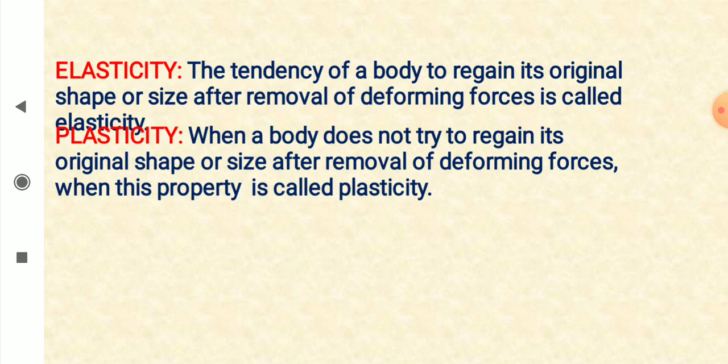And no substance is 100% elastic or plastic. क्वार्ट्ज और आइवरी बॉल्स ये ऐसे हैं जैसे कि हार्ड बॉल्स हैं, दे कैन बी ट्रीटेड एज कम्प्लीटली इलास्टिक, नियरली 100% इलास्टिक. एंड वैक्स क्ले कैन बी ट्रीटेड एज नियरली कम्प्लीटली प्लास्टिक.

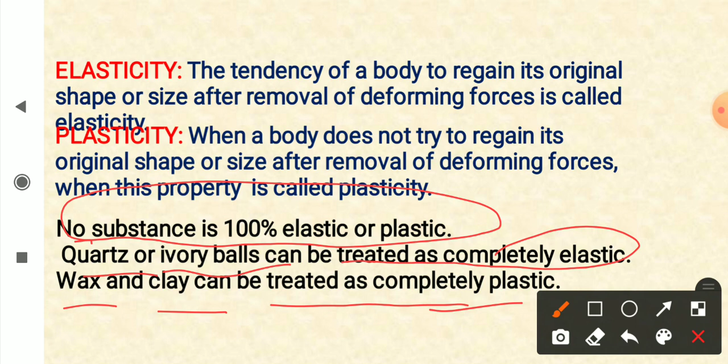So let us talk about stress. Now, when a deforming force is applied on a body, a restoring force within the body opposes it. This restoring force per unit area is called stress.

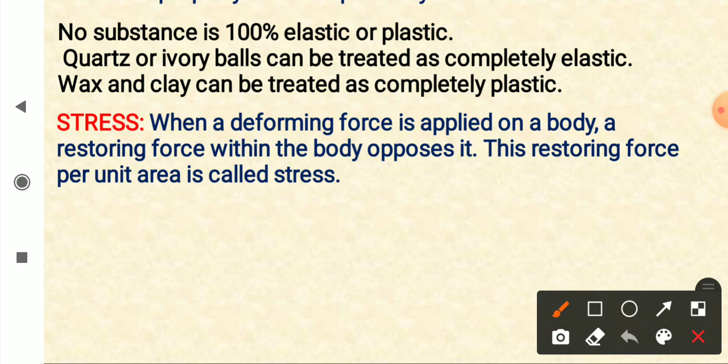कोई भी अगर बॉडी है whatever shape और size, इसको अगर आप एक्सटर्नल फोर्स लगा के डिफॉर्म करने की कोशिश करेंगे तो इसको अपोज करने के लिए इंटरनल फोर्सेस लगते हैं. These internal forces per unit area is called stress.

Similarly, supposing you have a long wire और इसको आप नीचे से पुल करके इसकी लेंथ बढ़ाना चाहेंगे तो इसके अंदर एक रेस्टोरिंग फोर्स होगा जो इसकी लेंथ को वापस लाना चाहता है. So that restoring force per unit surface area will be called stress.

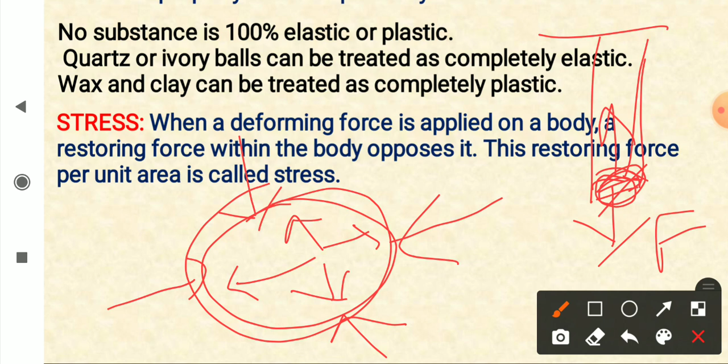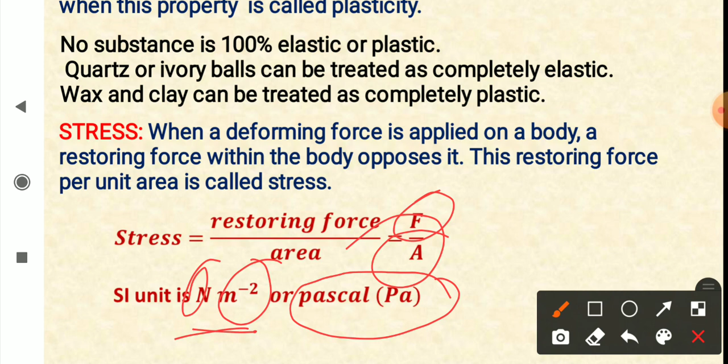So, stress is restoring force per unit area, and its SI unit: force is Newton, area per meter square, so Newton per meter square. And this is also pressure, its SI unit another name is Pascal, symbol PA. So Newton per meter square or Pascal, and this is a scalar quantity.

Now, types of stress. Stress can be of various types. First one, let us talk about normal stress.

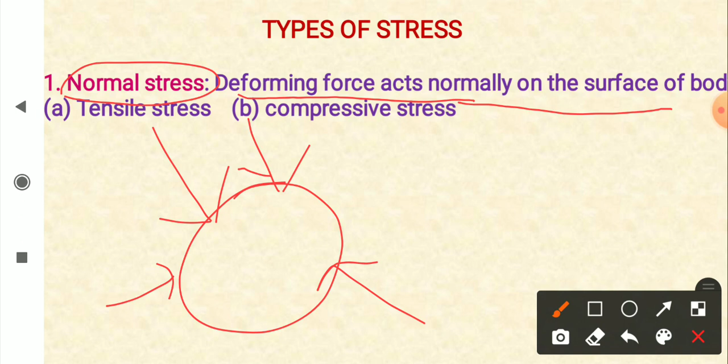Now, for normal stress, the deforming force acts normally on the surface of the body. कोई भी body के अगर normal आपने force लगाया है, so that is called normal stress. You can have a flat surface, and on this flat surface you can apply force like this. So surface के अगर normal या perpendicular force है तो वो normal stress देगा.

And then we have two types of normal stress: tensile stress and compressive stress. So let us talk about tensile stress. Now, tensile stress is produced in long wires.

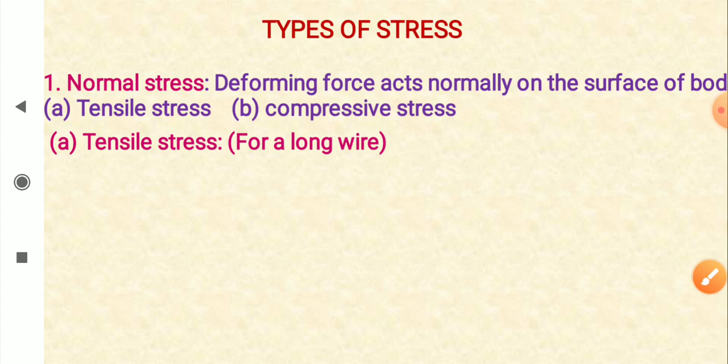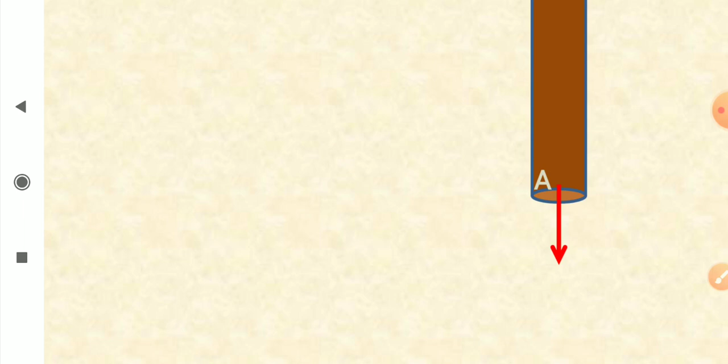Supposing we have a long wire and its area of cross section is A, you can see, and some external force is applied on it. आप इस वायर के इस एरिया पर फोर्स F लगाकर इसको पुल करने की या एक्सटेंड करने की कोशिश कर रहे हैं, and because of this, an internal force will come into play.

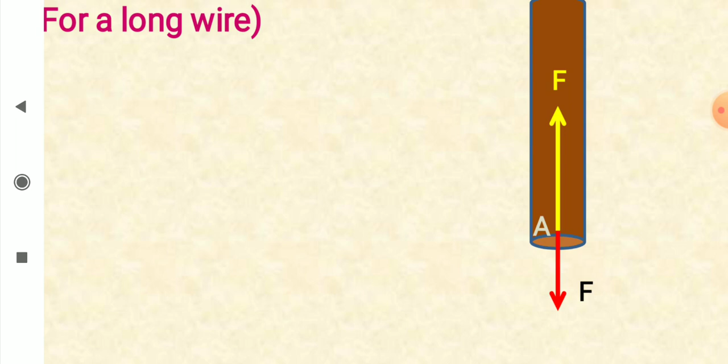And in equilibrium, when this wire is in equilibrium, then this internal restoring force and external applied force will be equal. So internal or external forces equal होंगे. So the tensile stress is restoring force upon area, and this restoring force is normal to the surface, so it is normal stress. So restoring force is also equal to applied force, so applied force upon area.

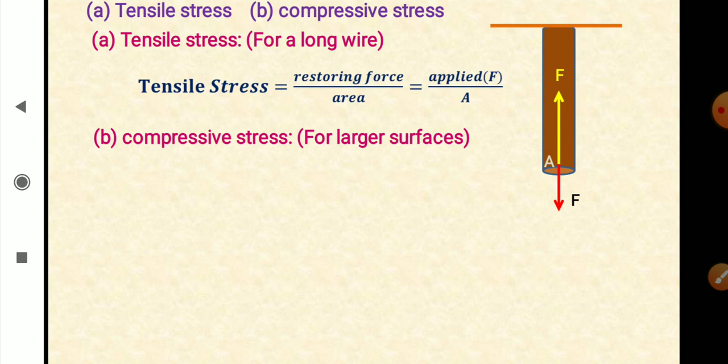So this is tensile stress applicable to long wires or rods only. Now compressive stress. Now supposing we have a body with large area.

Like supposing we have a ball dipped inside a liquid, as you can see here. The ball is dipped inside a liquid और liquid पर है, तो इस पर सब डायरेक्शन से फोर्स लग रहा है. As you can see, force is applied from all the directions on this ball, and these forces are normal to the surface of this ball. So this is normal stress.

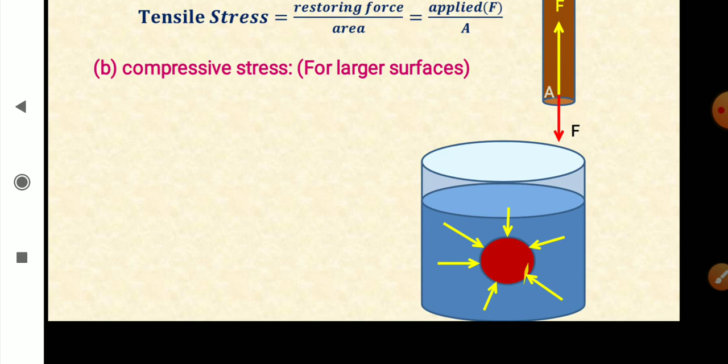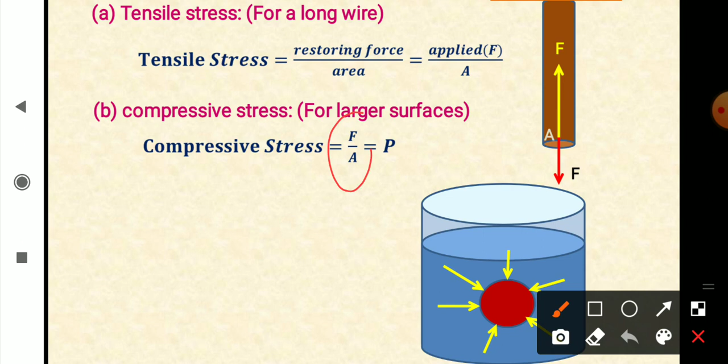When a body is compressed, there is compressive stress, and because of this there will be a restoring force inside it. That restoring force will be equal to the external applied force in equilibrium position. So the compressive stress will be applied force upon area, which equals the pressure. See, pressure is force per unit area, you know that.

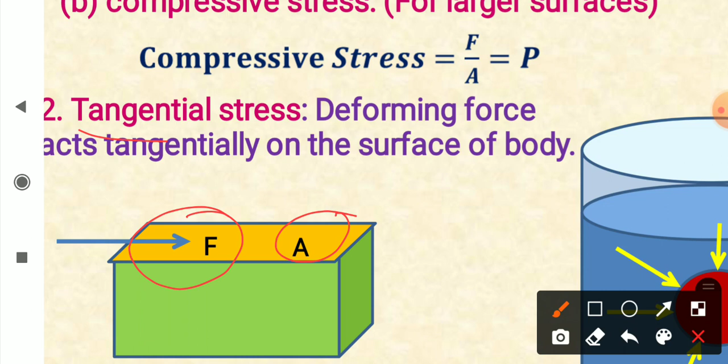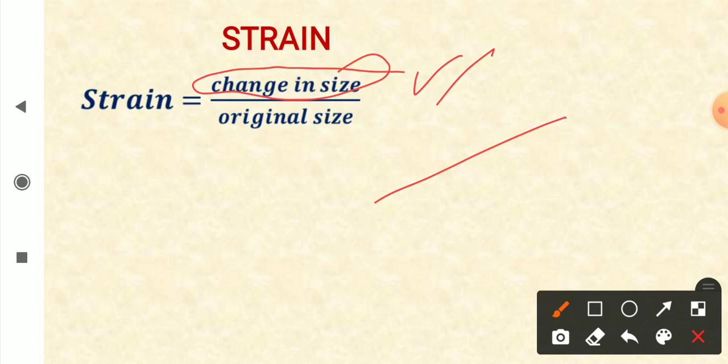Now let's see strain. When a stress acts on a body, the body undergoes strain. There will be a change in size - length may increase or decrease, or volume may increase or decrease, so there will be change in size and change in shape. So strain is change in size upon original size.

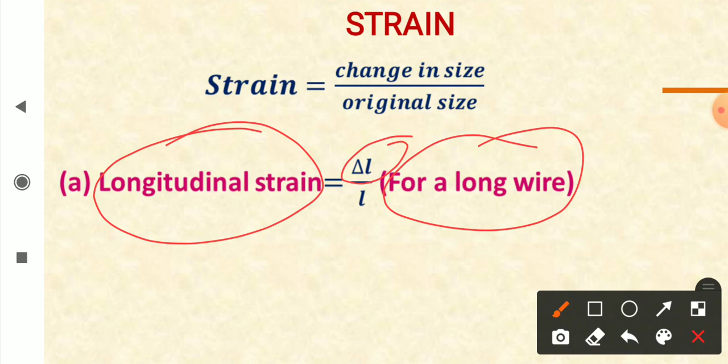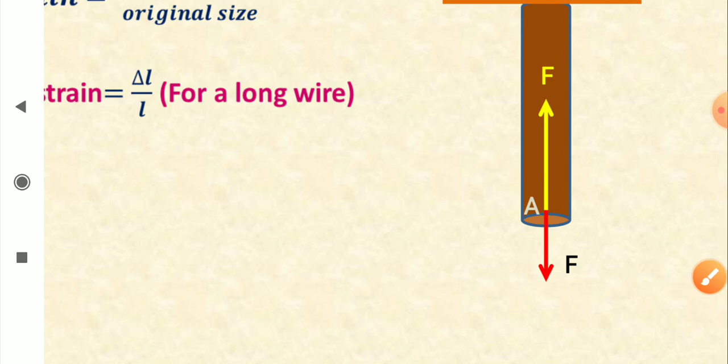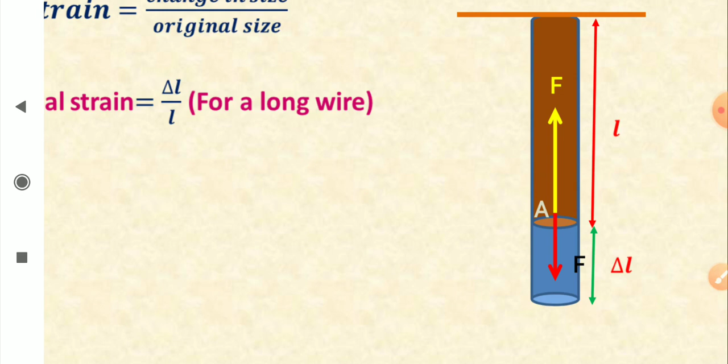For a long wire, the change in length will be quite large. If you look at a long wire, when you apply external force, its length increases, but there will not be much change in the width. So we consider only the length. If the original length is L and on applying force its length increases by delta L, then this increase in length upon the original length becomes its longitudinal strain. So change in length upon original length is called longitudinal strain, applicable for long wires.

Now let us talk about volumetric strain. In volumetric strain, the change in volume is large. So change in volume upon original volume - this is for larger bodies having larger surfaces.

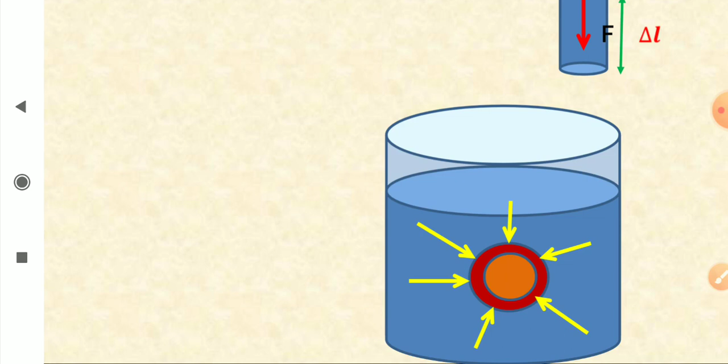Let's see, like here. When you apply this, due to external pressure, the volume decreases, the body gets smaller, it gets compressed. So here the strain is called volumetric strain.

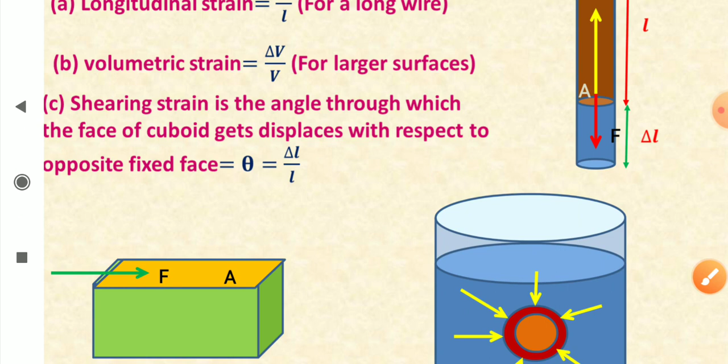So in that case, the angle through which the upper surface shifts with respect to the bottom is called shearing strain. We call it shearing strain. If the length of the sides is L, and the shifting is through distance delta L, the separation between these two surfaces is L, and the shifted surface has separation delta L, then this angle theta will be equal to delta L upon L.

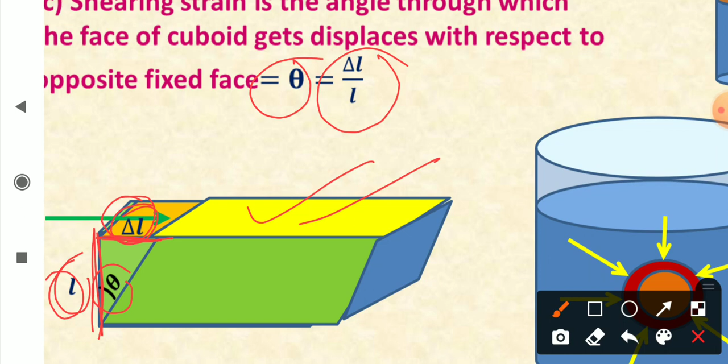This is called shearing strain, and this happens when tangential stress is applied. So shearing strain is the angle through which the face of the cuboid gets displaced with respect to the opposite fixed face, and this equals delta L upon L.

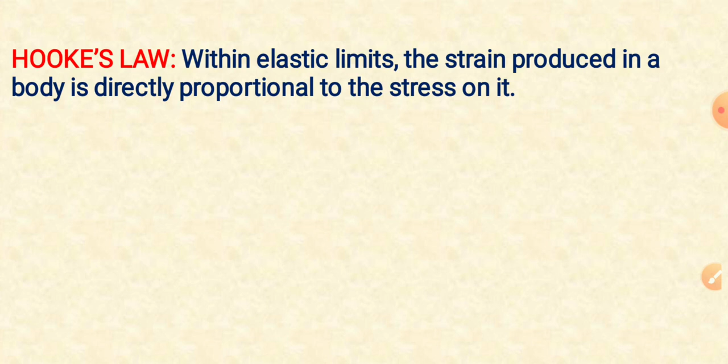So now, Hooke's law. We have done Hooke's law for springs - it is applicable here also. Hooke's law: within elastic limits, the strain produced in a body is directly proportional to the stress on it.

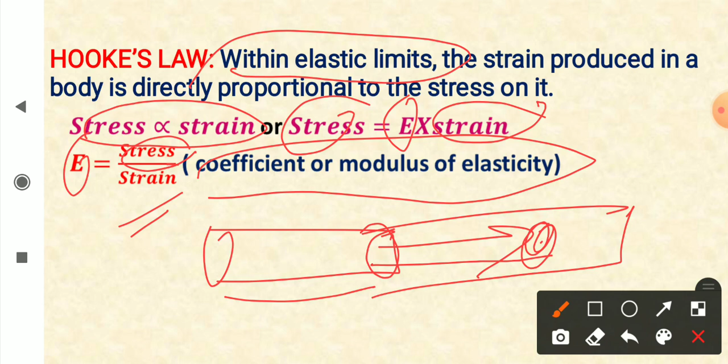Depending on the type of stress and strain, we have three different types of coefficients of elasticity, or modulus of elasticity. Let us begin with Young's modulus. For a long wire or a rod, we have Young's modulus, which is tensile stress or normal stress upon longitudinal strain.

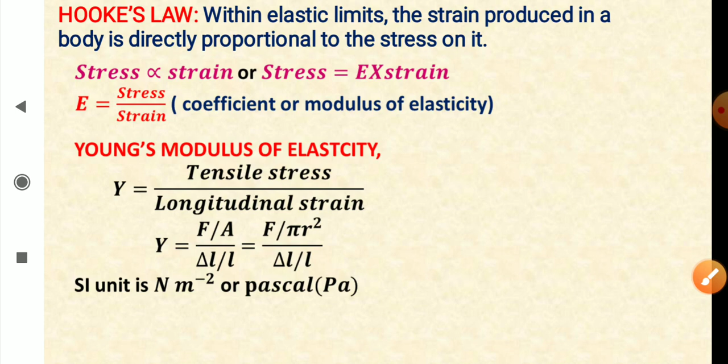External force applied is F here, or restoring force is also F. So stress is force upon area, that is also called tensile stress, and longitudinal strain is change in length upon original length, and area can be pi r square. So stress becomes F upon pi r square, where pi r square is the area of cross section of this wire, and r is the radius of this wire.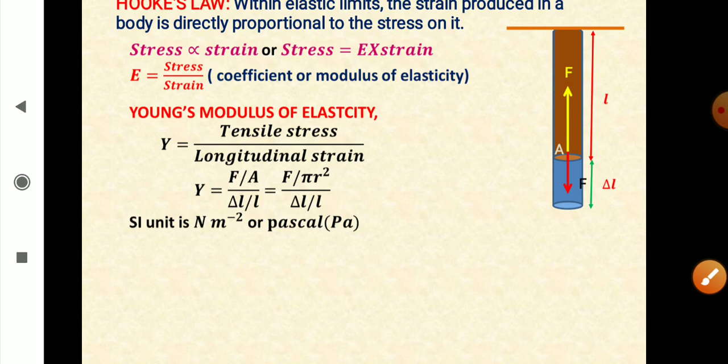The strain does not have any unit, so the unit of Young's modulus will be same as Newton per meter square or Pascal, which is the unit of pressure. So that is Young's modulus.

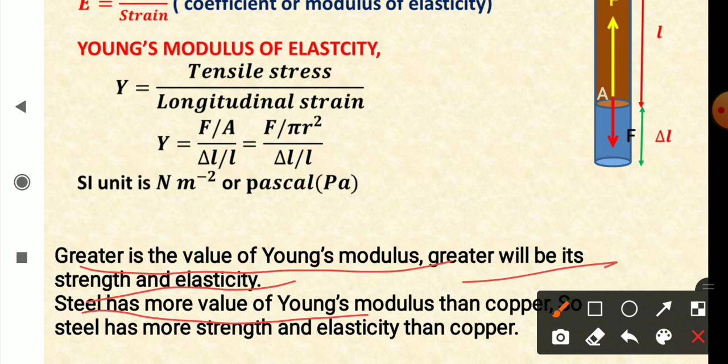Greater is the value of Young's modulus, greater will be the strength and elasticity. So for steel, the value of Young's modulus is much larger than its value for copper or gold. So steel has more strength and more elasticity than copper.

Now if you have a rubber band, it stretches to a very long length, and steel does not stretch much. You cannot see the increase in length of a steel wire without measurement. So you may tend to say that rubber is more elastic, but no, it is steel which is more elastic.

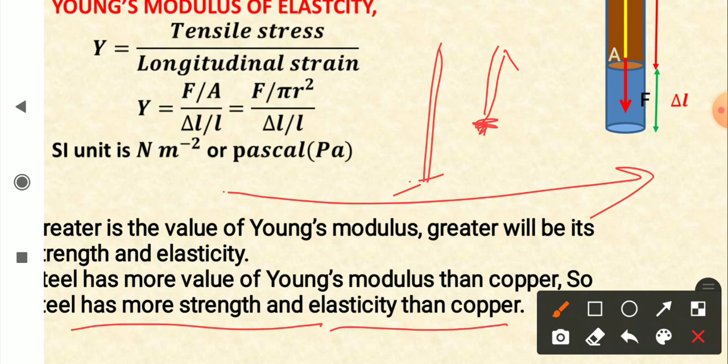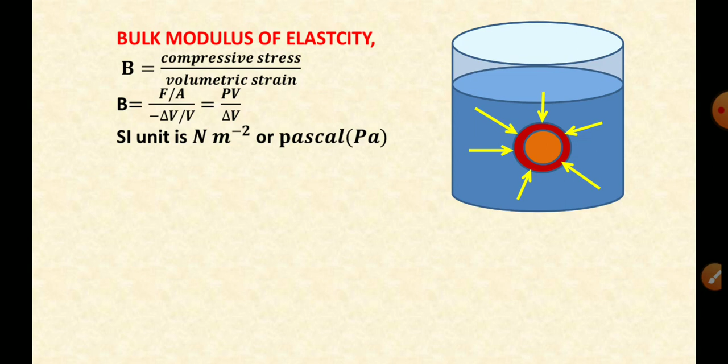Now let us look at a different type of elasticity, that is called bulk modulus of elasticity. When the change in volume is large, then we use this one. Here bulk modulus is compressive stress upon volumetric strain.

When this ball is immersed in this liquid, it is being compressed from all sides, so it is compressive stress, normal stress, and the volume changes, so it is volumetric strain. So bulk modulus is F upon A upon minus delta V upon V. Why minus? Because volume decreases.

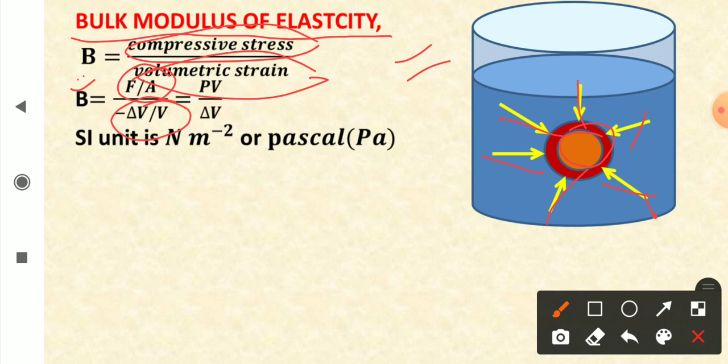Then you can rearrange things. This F upon A is pressure in the liquid, and this V goes up, and then you have this. SI unit is same, Newton per meter square or Pascal. Now, reciprocal of this bulk modulus is called compressibility, so 1 upon B is compressibility.

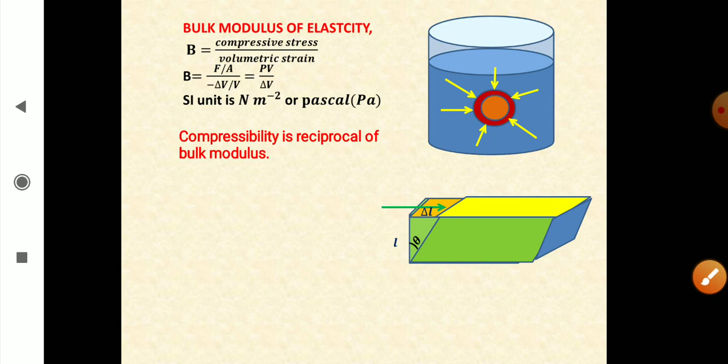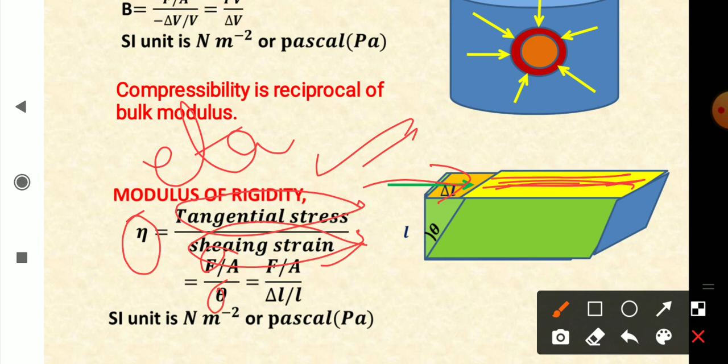Let us look at modulus of rigidity. When you apply a tangential force, the upper surface gets displaced, and modulus of rigidity is tangential stress upon shearing strain. It is represented by eta. So eta is equal to F upon A upon theta, or F upon A upon delta L upon L. Same SI unit, Pascal.

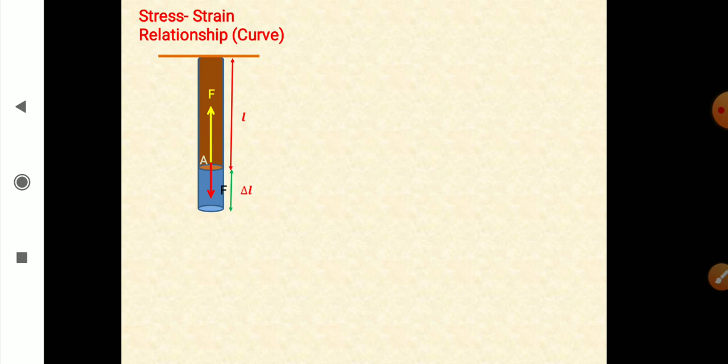And now stress strain relationship for a long wire. So here we have a wire, just try to understand it.

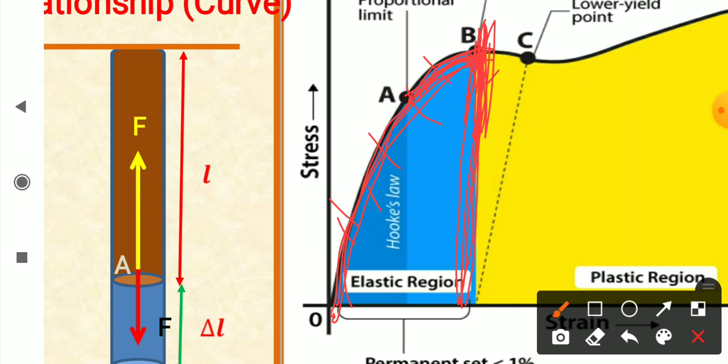If B is the maximum stress up to which this happens, then B is called its elastic limit - meaning until the wire returns to its original shape, we call that the elastic range. So this whole thing is the elastic range, and B is also called its yield point. Beyond this, its elasticity will end.

So after B, supposing initially my proportionality range was 5 kilogram weight, the elastic limit came at 7 kilogram weight, and beyond that, suppose I put an 8 kilogram weight - what will happen?

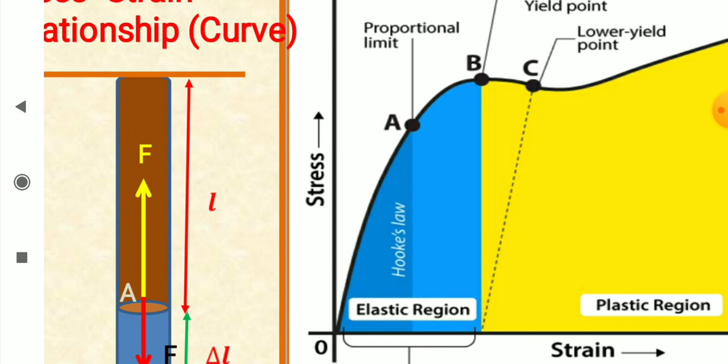That means at every stage some extra strain will be left on it. Finally, when the wire is completely unloaded - supposing I went up to 9 kilogram, and brought the weight back down to 0 kilogram - even then the wire does not return to its original size. The wire permanently retains some length, some strain.

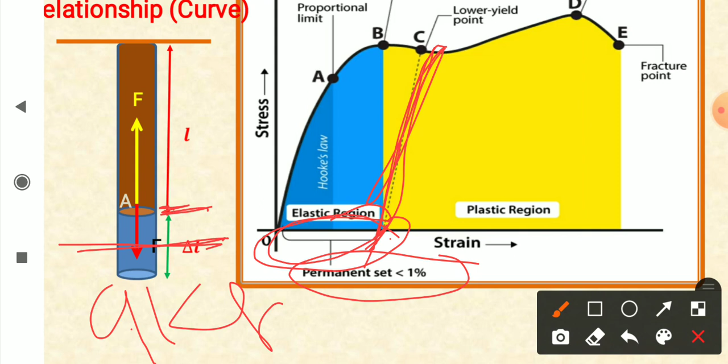So this is called permanent set, and for steel wire it is less than 1%. That means we can say the wire is permanently stretched - permanent stretching has occurred and it has crossed the elastic limit.

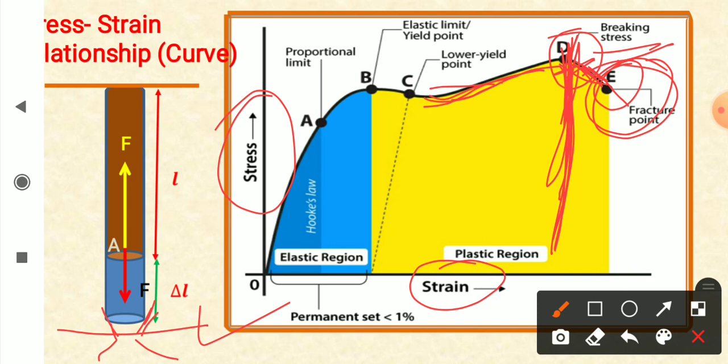I hope you understand, let's look at it now. So for the stress-strain graph, we show the following points: proportionality range OA - I have already explained this, it is a straight line and A is the proportionality limit.

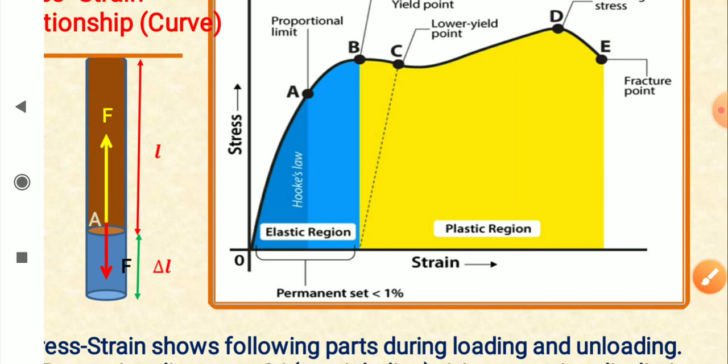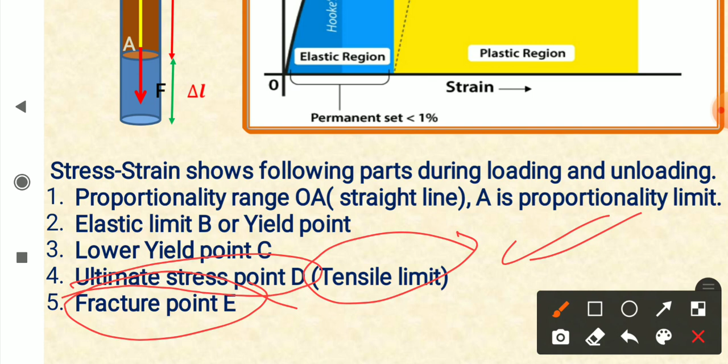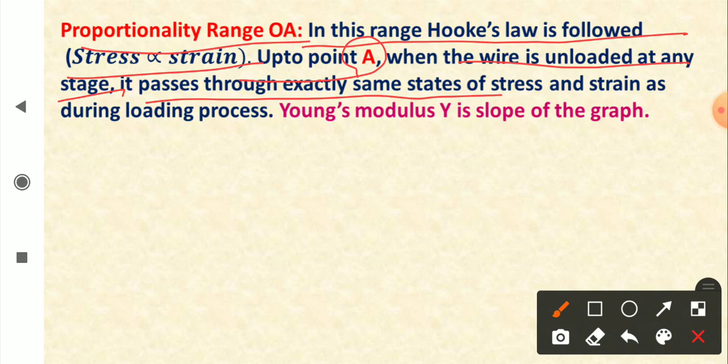And now its explanation - again the same explanation which I have already given you. Proportionality range OA: in this range Hooke's law is followed, that is stress is proportional to strain, and up to this point A, when the wire is unloaded at any stage, it passes through exactly the same states of stress and strain as during the loading process.

Now Young's modulus is given by the slope of the graph. Look at this - when we go back, yeah, here.

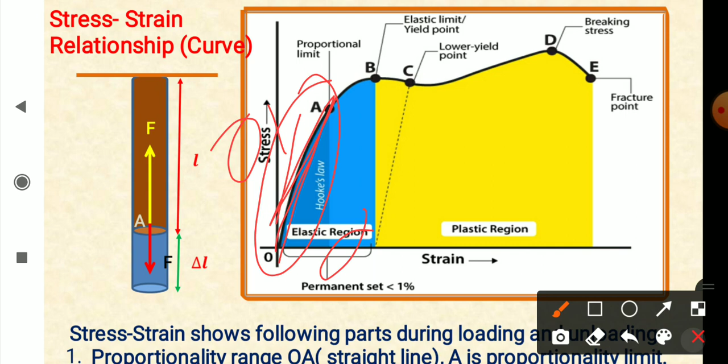The slope of this graph will give you Young's modulus. You know that Y is equal to stress upon strain. So the slope of the graph will give you Young's modulus. That's an important point to note.

Now let us talk about elastic limit or yield point. Up to point B, the elastic limit, when the wire is unloaded at any stage, it passes through exactly the same states of strain and stress, and the wire returns to its original size. That's an important point to note.

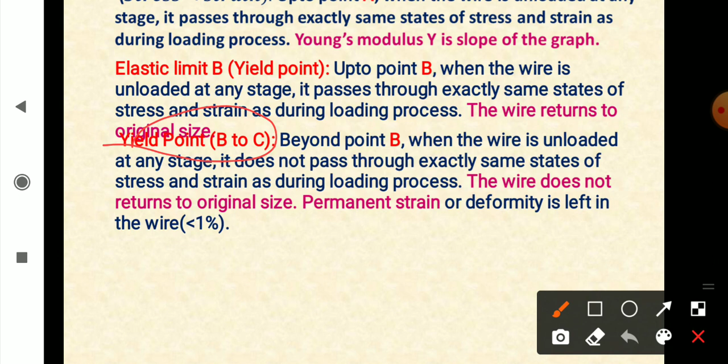Now the yield point, from B to C. Beyond point B, when the wire is unloaded at any stage, it does not pass through exactly the same states of stress and strain as during the loading process. The wire does not return to its original size, and a permanent strain or deformity is left in the wire, which can be less than 1%.

And the ultimate stress limit, which is beyond C. This is point D. So beyond point C, when the stress is increased, the strain increases very rapidly till it reaches the maximum stress, which is called tensile stress.

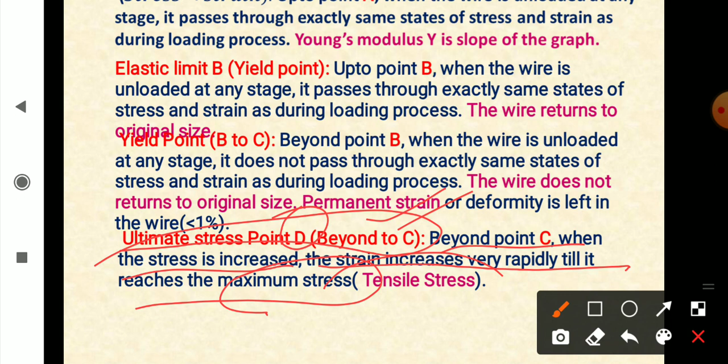And now the fracture point. Beyond this point D, which is the tensile stress point, when the stress is increased, necks develop in the wire and it flows till it breaks down.

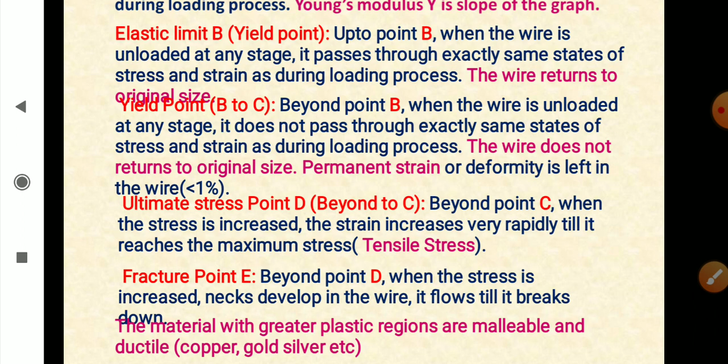The materials with a greater plastic region are malleable and ductile, like copper, gold and silver. That is an important point to note.

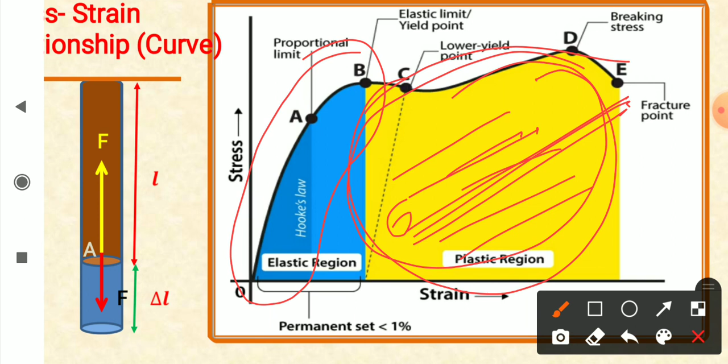And now let us look at elastic energy.

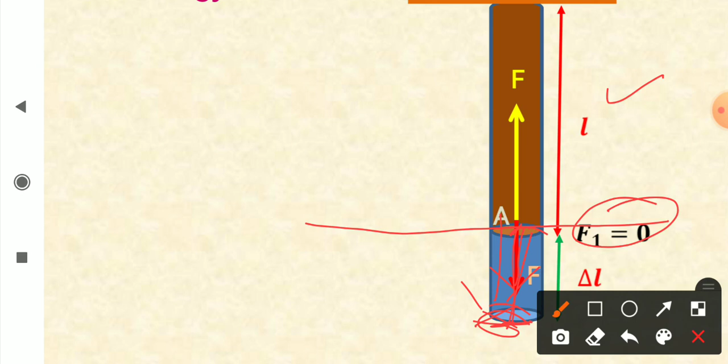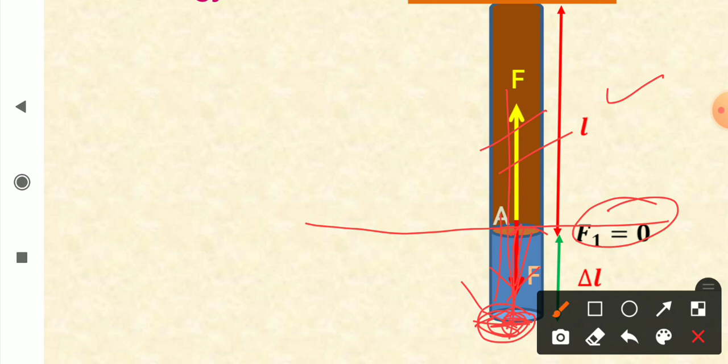Let's just see how we do it. The work done in stretching a wire gets stored in it as its elastic potential energy. So we are going to find out this work done.

Now look at it. When there is no force applied on it, it has its original length L. So here force is 0.

Now on this force you slowly increase the weights, stress increases, strain increases, till you reach the final force. Sorry, this has to be F2. This F2 is equal to F. So the final force applied here is F. So the force increases from 0 to F, right?

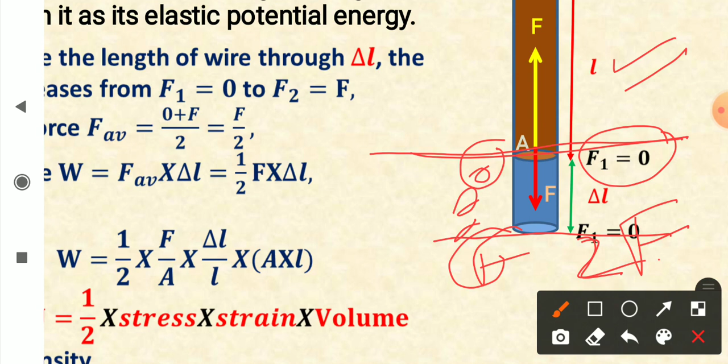Look at it here. To increase the length of the wire through delta L, the force increases from F1 equal to 0 to F2 equal to F. So we are gradually increasing the force from 0 to F. So the average force acting on the wire is 0 plus F upon 2, that is F upon 2. So average force is F upon 2. Now work done is force into displacement. So average force times displacement, which is delta L. So it's half F into delta L.

Now we will divide this F by A, look here, and delta L by L, and multiply by A and multiply by L.

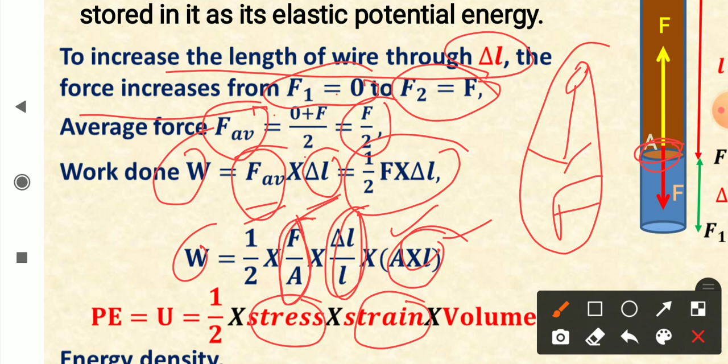So you divide by A and also multiply by A. This F upon A, force per unit area, is stress, and delta L upon L is strain, and A into L, the area of cross section of this wire into its length, is its volume. So the work done is equal to half stress into strain into volume, and by definition this work done is potential energy, elastic potential energy.

And then we have another term which is called energy density. Energy density is energy stored per unit volume. So in this wire, what is the energy density? That will be its energy stored per unit volume. So divide by volume on both sides, and you get energy density as half stress into strain.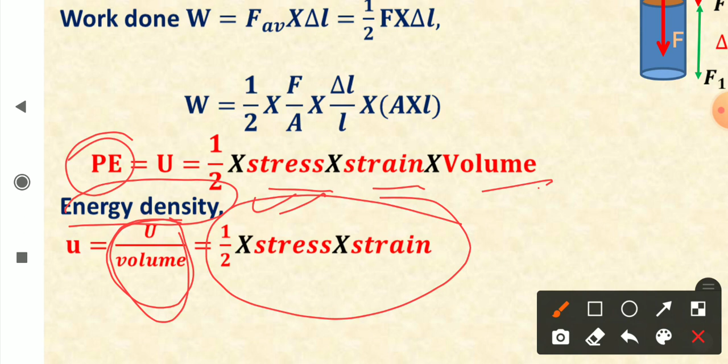And now let us take a simple numerical problem. It's a very simple problem. A 2 meter long wire is stretched through 0.20 millimeter by hanging a 5 kilogram weight. Calculate the stress, strain and Young's modulus of the wire if its diameter is 2 millimeter and acceleration due to gravity is 10 meter per second square.

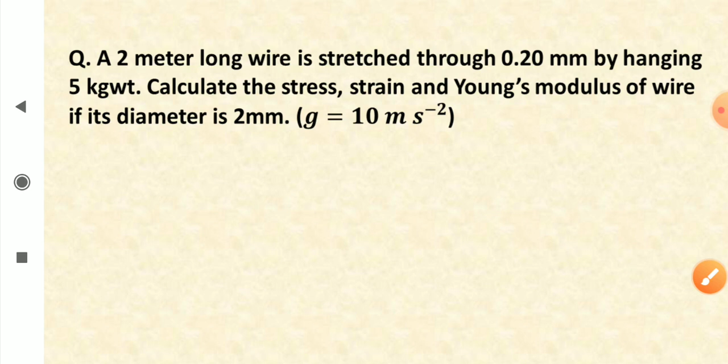Now let us write whatever is given to us. Original length is 2 meter, change in length is 0.2 millimeter, convert it to SI unit, so this becomes 2 into 10 to the power minus 4 meter. External force applied is 5 kilogram weight, convert it to SI unit by multiplying by g, and you get 50 Newton, so applied force is 50 Newton.

The diameter is 2 millimeter, so radius is 1 millimeter or 10 to the power minus 3 meter. So the area of cross section of the wire is pi r square, that is 3.14, and square of this is 10 to the power minus 6 square meter. So area of cross section we have.

Stress is force per unit area. Force is 50 Newton, area is this much, and you get 15.9 into 10 to the power 6 Pascal. Strain is delta L upon L. So delta L is 2 into 10 to the power minus 4, L is 2, so that is 10 to the power minus 4, and strain does not have any unit.

Now Young's modulus is stress upon strain. Stress upon strain, so this upon this, when you do it, you get, I have approximated it, so 1.6 into 10 to the power 11 Pascal. So this is the value of Young's modulus, Pascal or Newton per meter square.

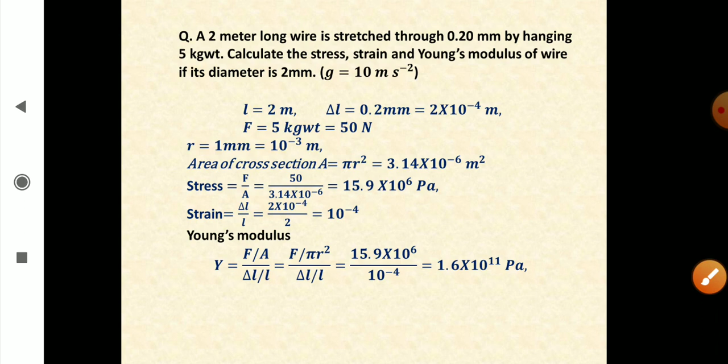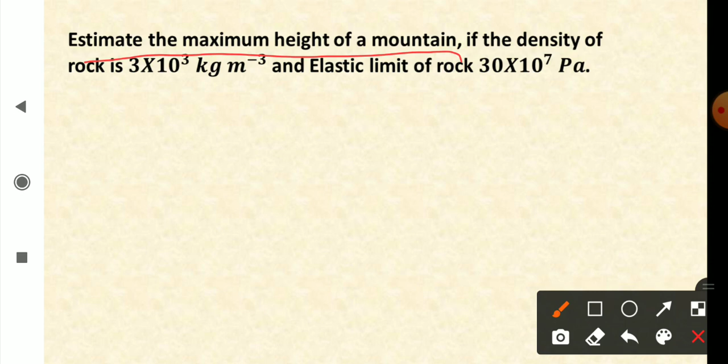So very simple problem. And one more problem. Estimate the maximum height of a mountain on earth if the density of rock is 3 into 10 to the power 3 kilogram per cubic meter and elastic limit of rock is 30 into 10 to the power 7 Pascal. So imagine this is the rock, on the surface of the rock there is a mountain, and what is the maximum possible height this mountain can have.

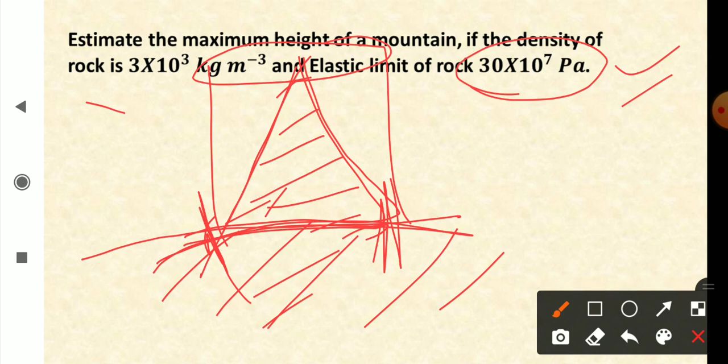That means we have to find out the maximum possible pressure that this rock can take, and that maximum possible pressure is given to be this much, as its elastic limit. Now the rock could be conical in shape, mountains can be like that, but let us assume that it is a cylinder, for the sake of simplicity, and we are taking its density to be uniform.

So let us see now. The density of rock, the mountain's density, is 3 into 10 to the power 3 kilogram per cubic meter. Elastic limit of rock, that means maximum pressure it can take, is this much. So maximum pressure on the rock is rho g h. Pressure equals rho g h, and this is equal to this much. So just change the side, h equals pressure P, which is the elastic limit, upon rho into g. Put the value of this, take g as 10, acceleration due to gravity, simplify, it comes out to be 10 to the power 4 meter, that is 10 kilometer.

So the maximum possible height of a mountain can be 10 kilometer, and the height of Everest is something like 8.848 kilometer.